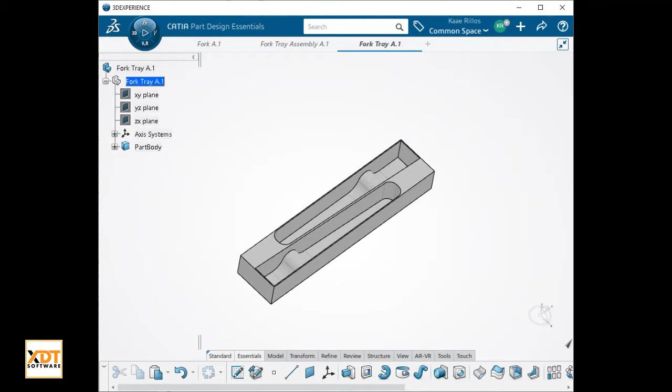Now I have CATIA 3DExperience and a 3D printer, so I can fix this problem. To do this, I'll use CATIA 3DX to design this tray insert that I will 3D print. Note the two humps shown, as well as the tapered ends for each compartment. These features will force my kids, on the rare chance they unload the dishwasher, to put the forks in with the tines pointing down, so they no longer catch on the drawer opening. Genius, eh?

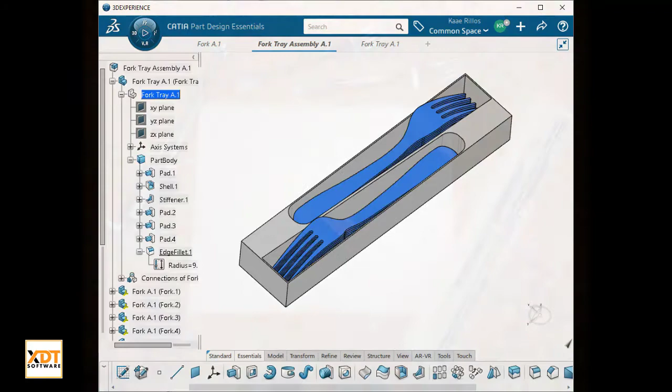For step 1, I just trace the outline of a good fork from two directions and measure the controlling points using a ruler and a caliper. Using Sketcher in part design, we enter all the points we measured using their XY coordinates. We could try to make a continuous spline through all the points. Don't do that. Because the contour varies so much, we would need to add many more control points to make it conform to the shape we need. Also, it's very difficult to make a multi-node spline straight, and the line sides of our fork are definitely straight.

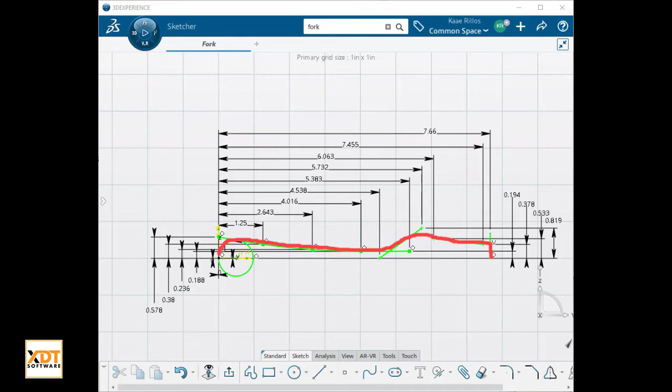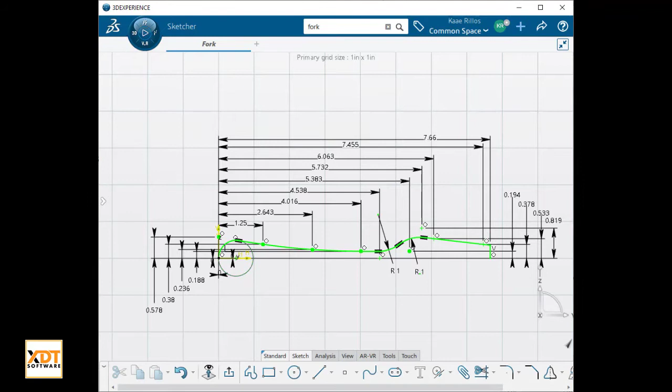A much better way is to break it up into lines and curves. In this example, we have a circle for the end, a gradual spline for the middle, and 3 lines for the business end. Using corner and trim and relimit, we modify the geometry to look like half a fork. Mirroring the geometry about the x-axis will give us a top view of the fork outline. Exiting the Sketch app gives us the profile in 3D space.

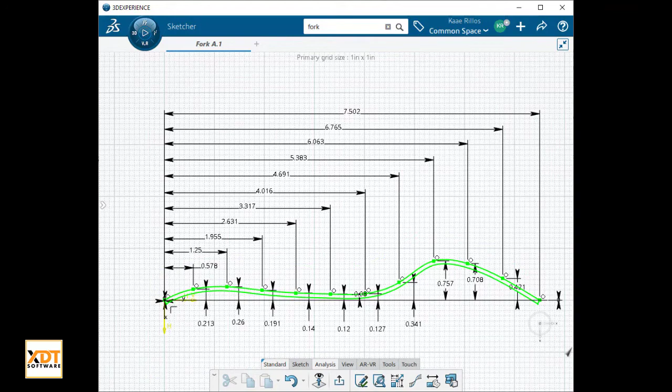We then enter the fork side points on a new sketch in a new body. In this case, we can string all the points in a single spline, as it is a gently undulating curve. We then offset the curve 80 thousandths and join the ends with lines to close the contour. Exiting the sketch, we can see two profiles at 90 degrees to each other.

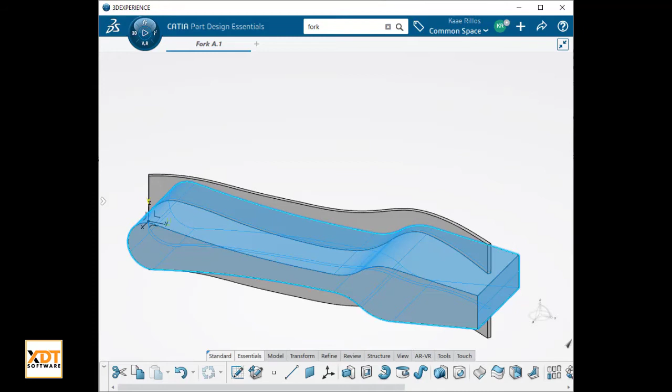Using the sketch and body we just created, we make a mirrored pad larger than the fork width. Making the other part body the in-work object, we make a mirrored pad that is taller than our fork using the first sketch. Using a Boolean operation, we create an intersection of the two bodies to get the solid shown. Using a pocketing feature and patterning it up and down, we get the tines.

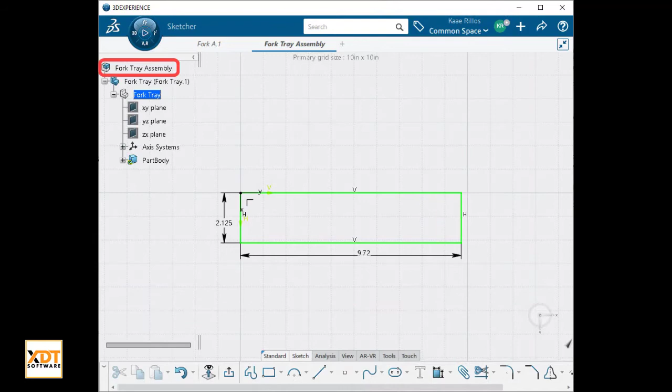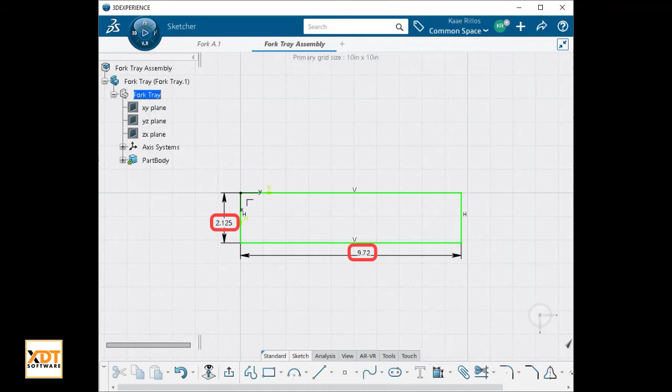For step 2, we'll create a product named Fork Tray Assembly, containing a part named Fork Tray. Inside the part will be a 3D shape we also name Fork Tray that will actually contain our design that we will 3D print. This is one of the areas where 3DX differs from V5 in the spec tree architecture. We'll start with a sketch that is 30 thousandths smaller than the compartment currently holding the forks. We then make a pad with the sketch that is the height of the compartment and use the shell command to make the walls 0.025 thick.

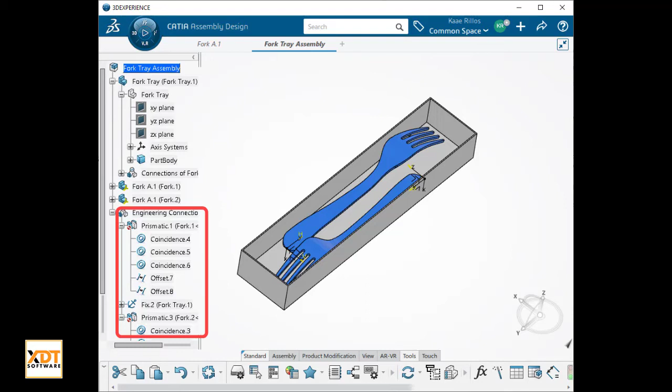The next step is to insert two part instances of the fork and constrain it to the floors and walls. Using assembly pattern, we can quickly insert multiple new fork instances in the vertical direction to simulate the actual drawer condition. Editing the fork tray 3D shape, we add a new sketch at the top and create a bisecting line for our stiffener. A new feature in 3DX is you can create a stiffener 90 degrees to the sketch plane.

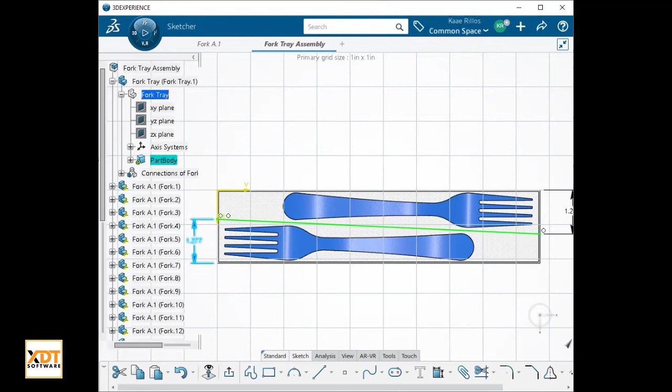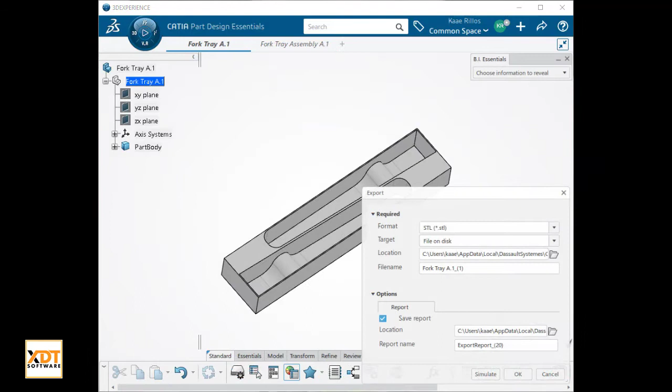Then, using a sketch plane off a vertical wall, we make our foolproofing bump and make a corresponding pad for that pocket. We repeat this for the other side. Finally, we fill in both ends with a radius adjoining the spoon end. After saving everything on the web using ENOVIA, we then resave the 3D shape as an STL. We then read in the STL into my Cura software, change my build plate adhesion to brim, and slice it. We then transfer the G-code to my Creality printer.

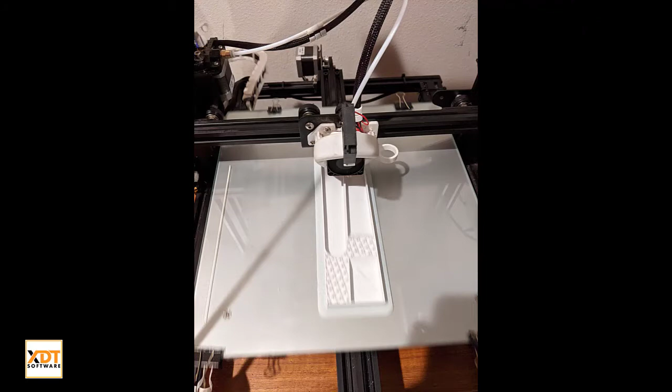Here the printing has been going on for a bit, but you can see the infill for both the bumps and the pocket ends. And here's the completed printed part. The brim you see makes it easier to remove it from the glass plate. Here is the part cleaned up with the brim removed. It fit perfectly in the existing compartment.

The forks loaded perfectly. The bump only allows one fork to be loaded before the user realizes their mistake. It's way easier to load it the right way. And the taper won't allow forks to be loaded in the wrong direction. As I had 2 compartments for forks, I printed another one that night. As you can clearly see, pending disaster was averted, and my kitchen was saved from almost total ruin, using a little bit of ingenuity and CATIA 3DExperience.